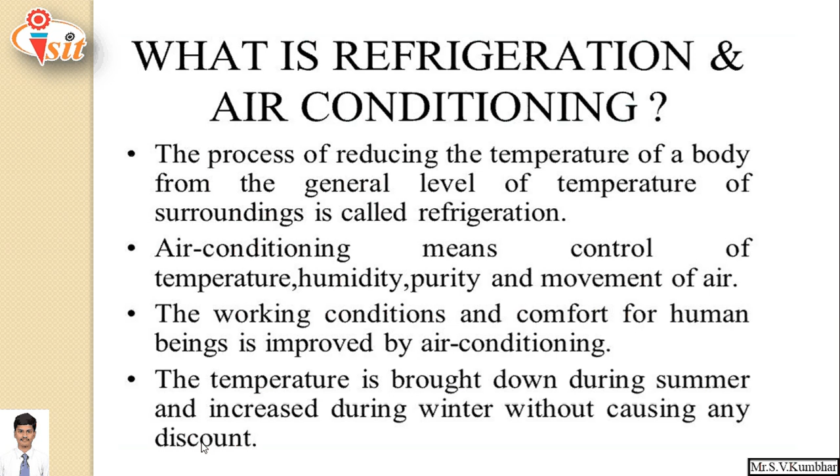So the terms air conditioning and refrigeration may be used to describe virtually the same thing, but the final goal is different. In case of refrigeration, as it is a closely packed system where the object which is to be cooled is kept, the temperature of that object is maintained below atmospheric temperature.

But in case of air conditioning system, the temperature of air is maintained as per our requirement, and purity, movement of air, humidity is controlled with the help of the air conditioning system.

The processes used in refrigeration and air conditioning use the same components to perform the task of maintaining the temperature of controlled space. The difference between the two systems is that air conditioners are not used to maintain a low temperature.

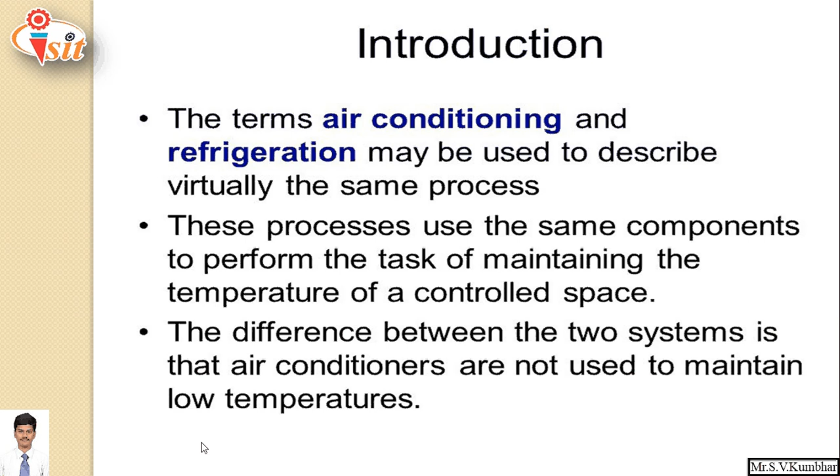Applications of refrigeration and air conditioning. In last lecture we have also studied applications of refrigeration. So the first application of refrigeration is food processing, preservation of perishable items and distribution.

Second, chemical and process industries. In chemical and process industries, to store blood at a low temperature, to preserve chemicals at low temperature, we use a refrigeration system.

Third application, special applications such as cold treatment of metal, medical, construction, ice skating, etc. In medical application, generally we preserve medicines below room temperature.

And one last one, comfort air conditioning. Applications of air conditioning are industrial, such as in textile, printing, manufacturing, photographic, computer rooms, power plants, vehicular, etc. In textile as well as in printing, air conditioning is required.

In manufacturing, such as CNC, VMC, then HMC horizontal machining center, we require air conditioning system because that process works with the help of air conditioning, that is conditioned air.

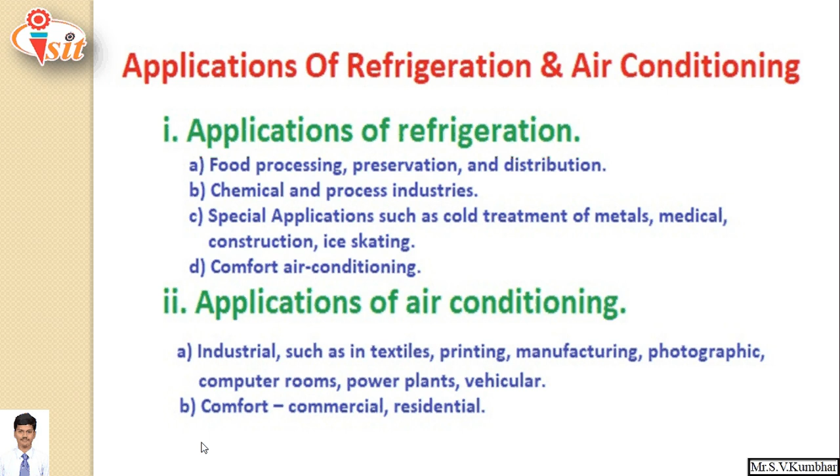Introduction to refrigeration and air conditioning. So generally, refrigerator and air conditioning is used to cool products or a building environment. Here, work has to be supplied to the refrigerator in order to absorb heat energy from the low temperature reservoir, and that heat is rejected to the high temperature reservoir, and generally atmosphere is used as the high temperature reservoir.

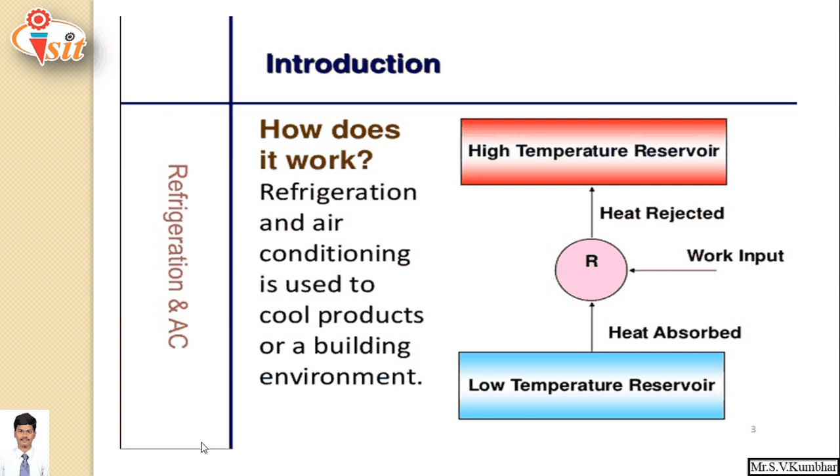In case of air conditioning, from the low temperature reservoir, air is allowed to flow through filter so that its purity is maintained. A fan or blower is used for the movement of air to control movement of air.

Working. This is the diagram which gives us the working of air conditioning, which is very similar to vapor compression refrigeration system.

So compressor is used, the second component, compressor is used to compress refrigerant. So here high pressure and high temperature vapors of refrigerant are produced. This high pressure, high temperature vapor of refrigerant then flows to the condenser.

In the condenser, a fan is provided. Forced circulation is used, meaning ambient air is forcefully allowed to move over the condenser and hot air is sent back to atmosphere. So in this way, heat is rejected in the condenser.

After that, if any moisture content is there, a dryer is used, and after that, through the expansion valve, pressure drops down considerably. As soon as it flows through the thermostatic expansion valve, its pressure drops down and it is converted into low pressure, low temperature liquid refrigerant.

This low pressure, low temperature liquid refrigerant then flows through the evaporator, where again a fan is used, the indoor blower, we call it indoor blower.

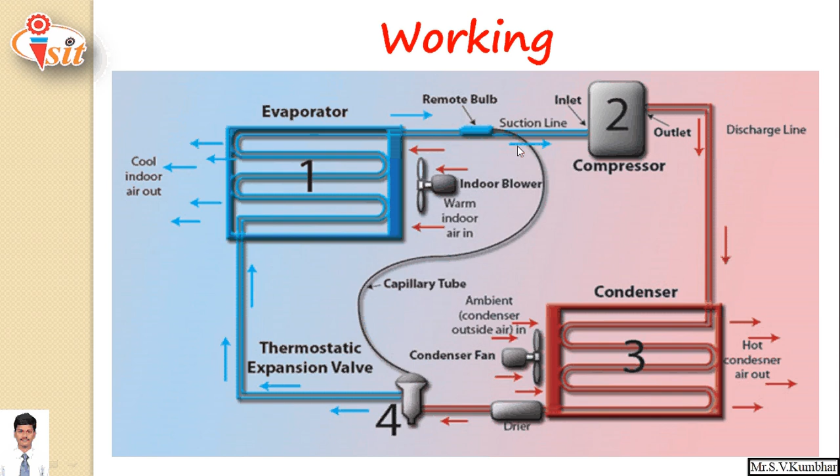Here air forcefully moves over the evaporator, and in this way cold air is sent back indoors with proper humidity, and due to heat rejection of air to refrigerant, it is converted back into vapors. So this vapor of refrigerant is sent back to the compressor and the cycle continues.

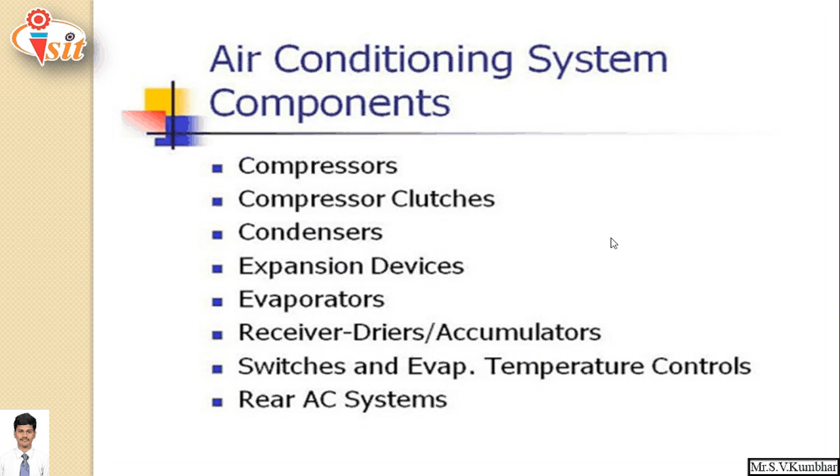So first component is compressor, second compressor clutches, third condenser, fourth expansion valve, fifth evaporator, sixth receiver dryer accumulator, seventh switches and evaporator temperature control, and last one rear AC system.

Classification of air conditioning system. So there are many ways to classify air conditioning system. First one, based on way of air cooling: first, direct cooling system; second, indirect cooling system.

In direct cooling system, air is directly allowed to flow over the evaporator coil where its humidity as well as coldness is maintained. In indirect cooling system, two circuits have to be used to cool air.

Second, based on major function: comfort air conditioning system and industrial air conditioning system. So generally, comfort air conditioning system is used in domestic as well as commercial application, and industrial air conditioning system is used in industries for products like printing, etc.

Based on season of year, air conditioning systems are also classified as winter air conditioning system, summer air conditioning system, and year-round air conditioning system.

In winter air conditioning system, hot air is required. So the cycle is reversed, meaning hot air obtained from the condenser is allowed to flow through the room, and in this way hot air is obtained.

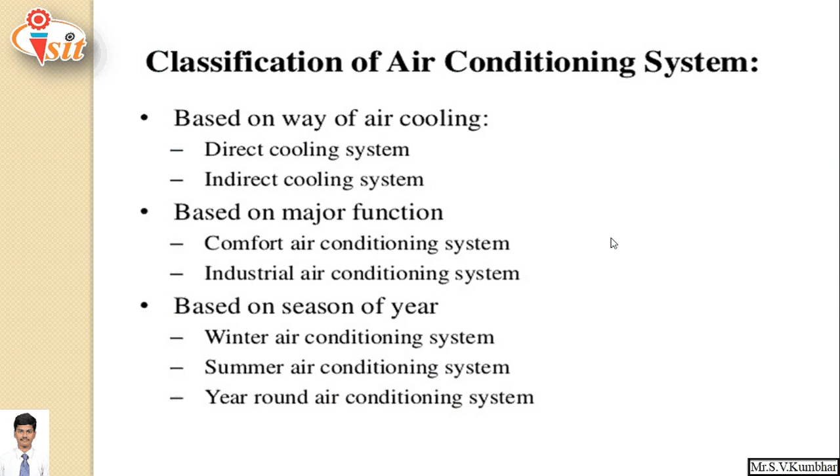So these are the different types of air conditioning that we use nowadays. The most famous is a split unit, because the condenser and evaporator unit are split.

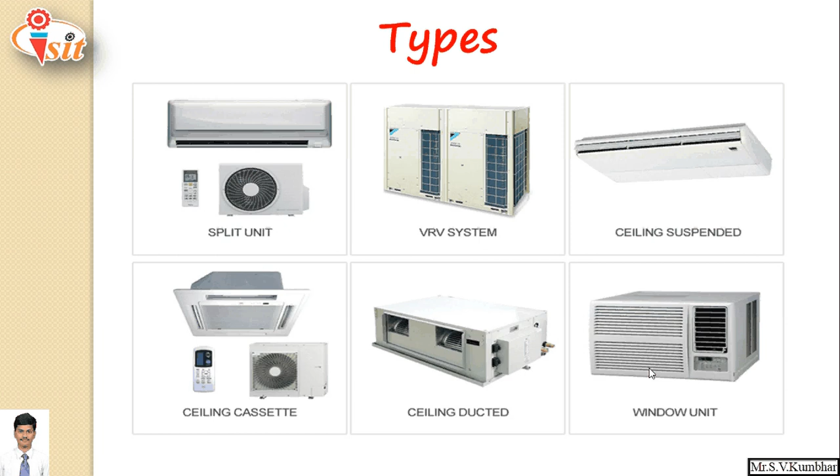Next, VRV system, ceiling suspended system, ceiling cassette system, ceiling ducted system, and window unit. This window unit was very famous in earlier days, which was located in the window, that's why it is also known as window air conditioner. So first we will start with central air conditioning system.

Among all the types of air conditioning system, this is the most common type of cooling system, as it is the most preferable for larger homes due to its ability to cool efficiently.

Central air conditioner circulates cold air through supply and return ducts, so a ducting system has to be used in central air conditioning system. Supply ducts and registers, which are in the walls or floor, carry cooled air into the home.

Once the air becomes warm, it circulates back into the supply duct and registers, where it will then be transported back to the air conditioner.

Installing a central air conditioning system requires a lot of planning and preparation, as sizing is crucial to the functionality of the system. So if you install a system that is of the wrong size, even if it's energy efficient, you will find that your utility costs are more than they should be.

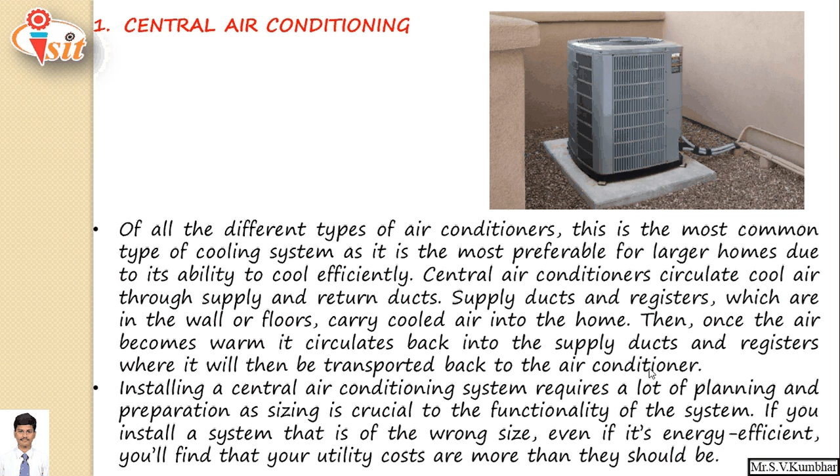Second, ductless mini split air conditioning system. In earlier cases, we have to use ducts, but here in this system, ducts are not used. That's why it is known as ductless mini split system, and it is mostly common in parts where systems have been retrofitted.

Like a central air conditioning, these systems have an outdoor compressor or condenser and indoor handling unit.

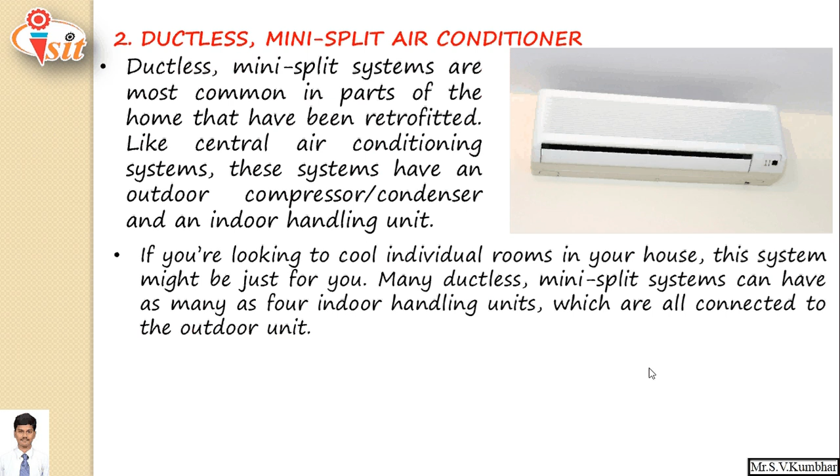So if you are looking to cool an individual room in your home or office, this system might be just for you. Many ductless mini split systems can have as many as 4 indoor handling units which are connected to an outdoor unit. Each zone has its own thermostat, allowing you to adjust the temperature of each room accordingly.

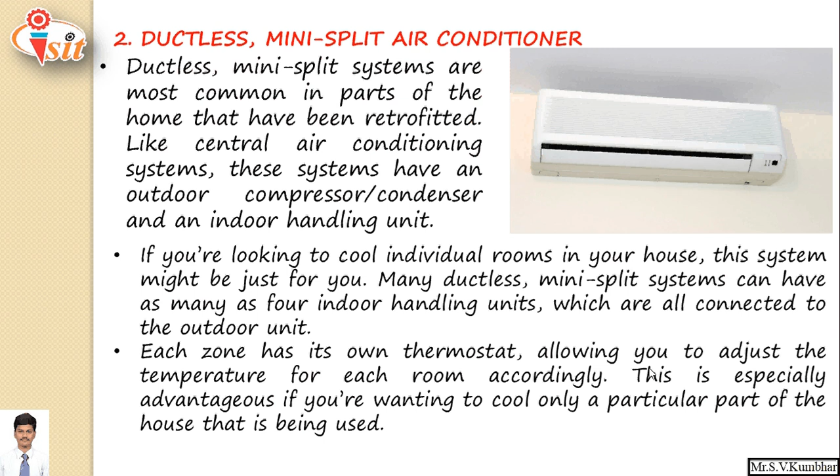This is especially advantageous if you are wanting to cool only a particular part of the house that is being used.

Window air conditioning. As the name indicates window air conditioning, so some part of this air conditioning lies inside the room and half part lies outside the room. That's why it is known as window air conditioning.

So it is a compact unit cooling only a particular room, that's why it is also known as a unitary system. This system is installed in the window of a room.

Window air conditioning system cools a room's temperature by emitting warm air out the back of it and blowing cool air into it. These types of units are best for those who live in small spaces.

It would not be ideal for a larger home, as you will discover that it doesn't cool efficiently in that kind of environment.

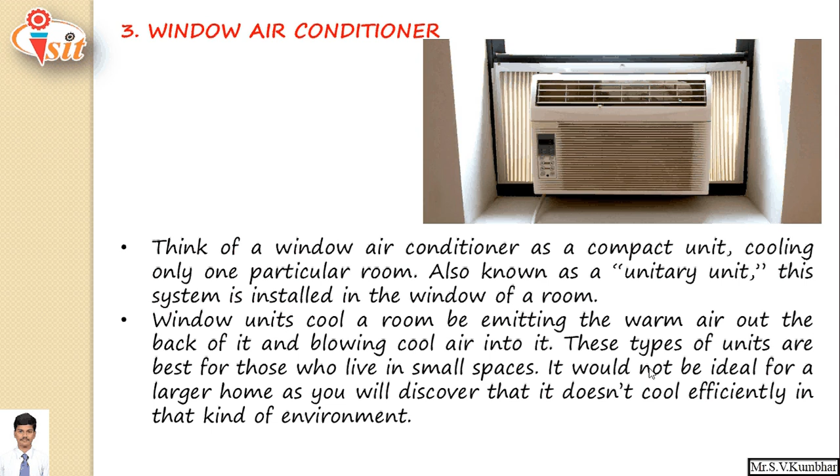Portable air conditioning system. Portable air conditioners are considered the next generation of window units. This type of air conditioning unit takes air from the room and cools it, then directs it back into the room. The unit then vents any warm air outside by means of an exhaust hose that is installed in a window.

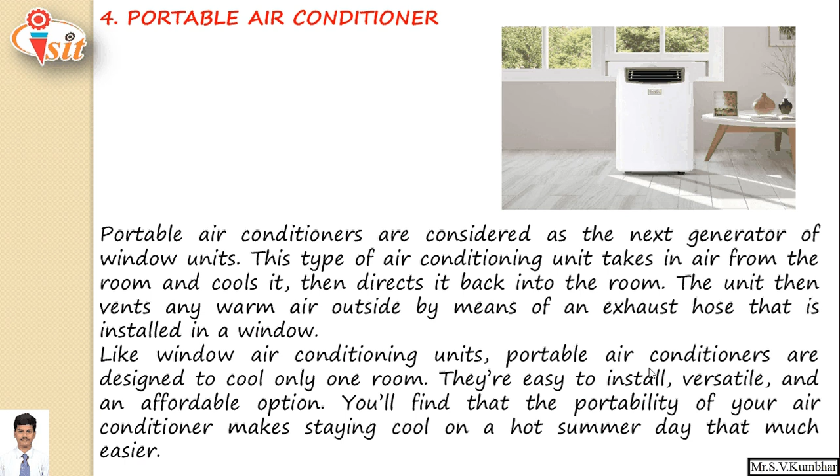Like a window air conditioning unit, portable air conditioners are designed to cool only one room. They are easy to install, versatile, and an affordable option. You'll find that the portability of your air conditioner makes staying cool on a hot summer day that much easier.

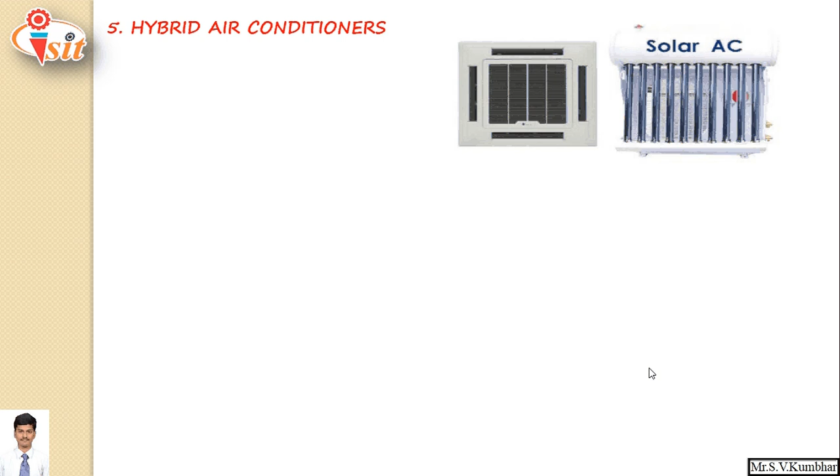Hybrid air conditioner. As the name indicates, hybrid air conditioner works on electricity as well as solar or some other alternative. Like hybrid cars, hybrid heat pump systems alternate between burning fossil fuel and using electricity to run. The system intelligently chooses between the two energy sources in order to save money and energy.

If you want to have a hybrid air conditioner, you won't be held hostage by rising energy prices.

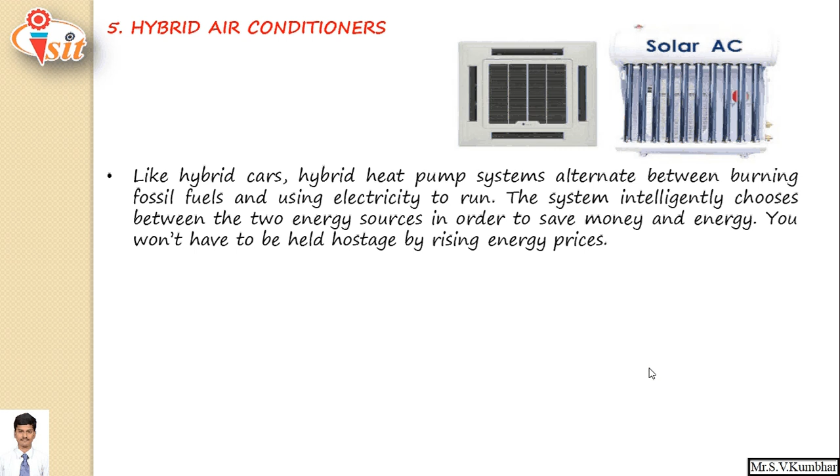In the summer, your heat pump works as it normally does, pulling heat from your home and distributing it outdoors, to the atmosphere.

But in winter, your hybrid heat pump system works in reverse manner, pulling heat from the outside environment and distributing it to your home. It is very similar to the second law of thermodynamics, right?

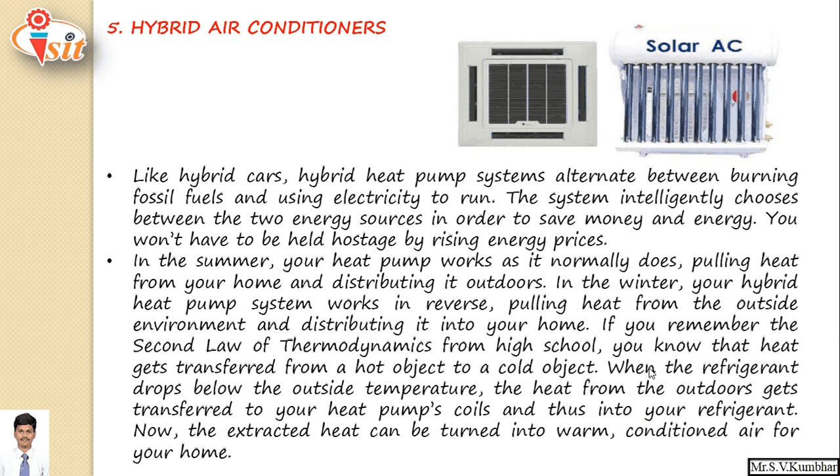When the refrigerant drops below outside temperature, the heat from the outdoor air gets transferred to your heat pump coil and thus into your refrigerant. Now the heat is extracted to turn into warm and conditioned air for your home.

So this is all about introduction to air conditioning system. Thank you very much.